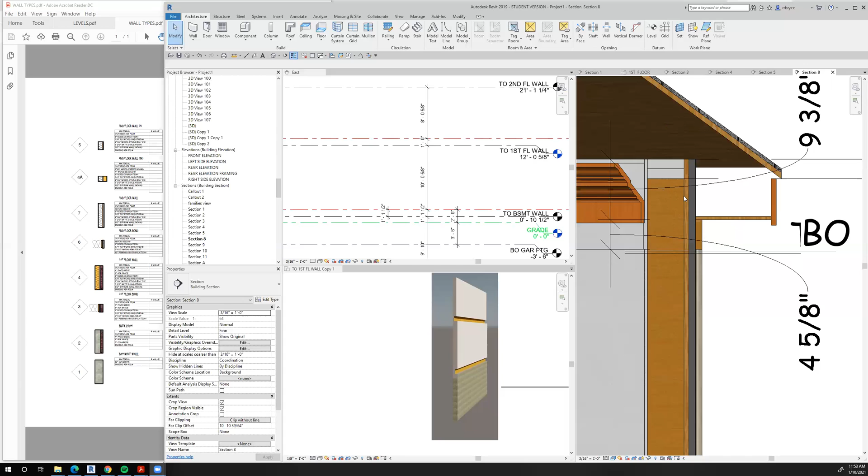You may have a different fascia size. You may have a different overhang, and all of those things will change where exactly the height of these two components would be. But we'll use that for now, and we're going to make a second stacked wall. So here's our first stacked wall. Let's get back here. That's our first stacked wall. That's our exterior house wall.

Now, what I like to do is, let's see, what's the best way to show you that real quick? Might not be able to show it. Yeah, let's take a look at section 1. No, that is section 1. All right. I like to keep a working example of all of my different stacked walls in my project. So I'm going to say that this is going to be my working example area. So I'm just going to copy this guy over to here, and I'm going to click on him.

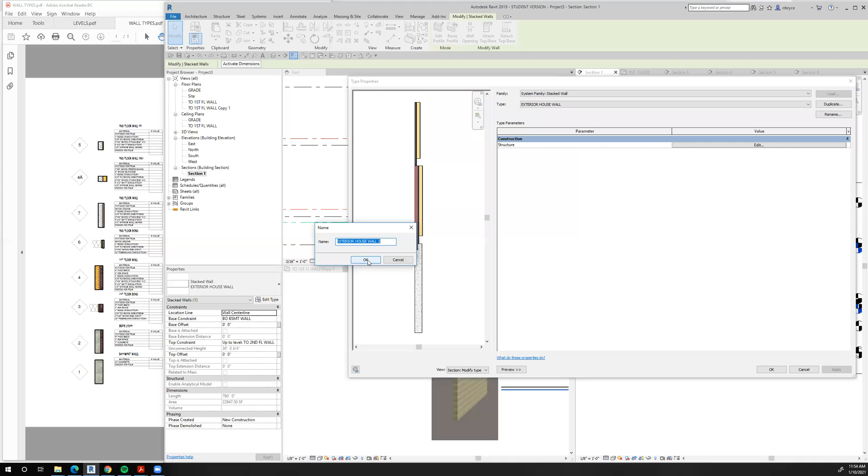We're going to do the same thing, edit the type. We're going to duplicate it, and we're going to call it exterior house wall 2. And we'll say okay. So I'm going to keep my exterior house wall as we've made it, but now we're going to change it, and we're going to add 2 more at the top. I guess it'd be these 2 right here. So this guy, we're going to make this height, what did we say, 9 3/8.

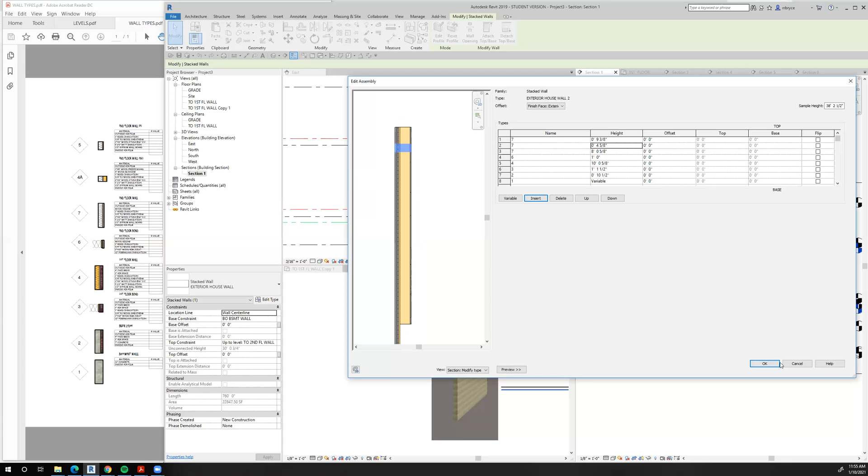That didn't work out too well. All right, let's change that to 9 3/8 inches. And then we're going to change this guy to 4 5/8 inches. Okay, so let's check that. We're going to make that 0, 4 5/8. Okay, so I've got these 2 different stacked walls in here. Now my issue is, remember that this total wall height, let's say okay to that for just a second, the total wall height has to be 8 foot 0 5/8.

Okay, so I've added 2 more pieces to that. So I have to add these 2 heights together and subtract it from my 8 foot 0 5/8, because that's the total height. So 5/8 and 3/8 is 8/8, which is 1 inch. So I have 9 and 4 is 13, plus 1 is 14. So I have to subtract 14 inches, or 1 foot 2, from 8 foot 0 5/8.

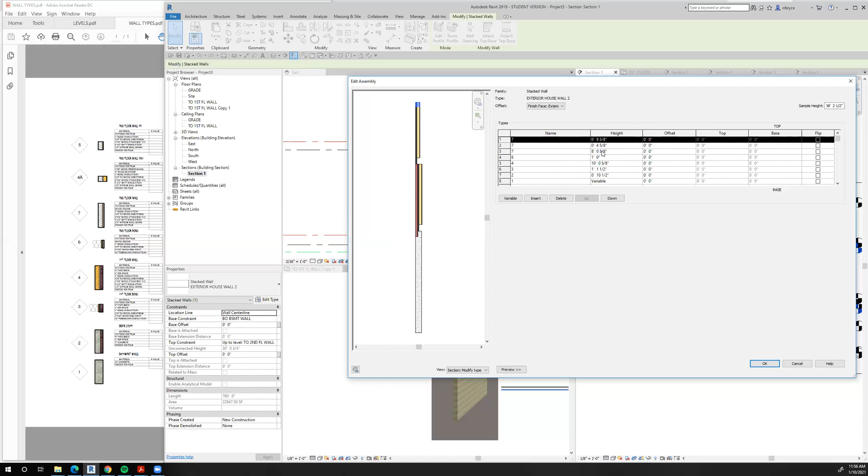So if I make this 10 inches, that'll be my 2. And I take this from 8 to 7. So these 3 should still add up to 8 foot 0 and 5/8. So let's see if in fact it does.

3/8 and 5/8 is an inch, and 5/8, we'll leave that. So 9 and 4 is 13, plus that 1 inch is 14. So that's 24. So that's 2 feet, 7, 8, 9 foot, 0 and 5/8. So it adds up. Okay, so we put those 2 in. We haven't changed the types yet.

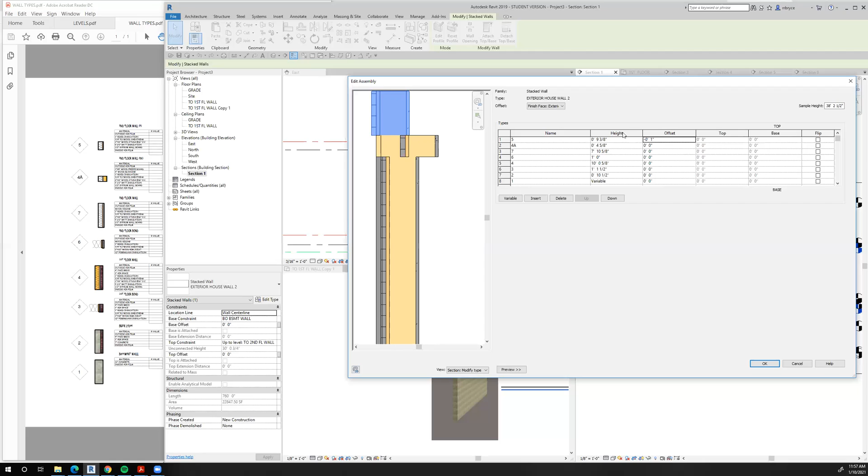So we're going to change this from wall type 7. We'll change it to wall type 5. And we're going to change this guy from 7. We're going to change that to 4A. All right. Now, I said we made a mistake on that one. And we're going to have to offset this guy by, let's try an inch and see what happens. It's a -1 inch. Let's see what happens there. That looks okay. That looks like it lines up.

But here, I have to take out the 4 inches that we put in there for that. So 4A, we're going to have to change. So we'll say okay to that. We'll say okay to that. And so now it's a little goofy, but we're getting closer to where we want to be. What I'm going to do now is I'm going to go back to floor plan. We're going to go wall. We're going to go back to 4A is what we're looking for.

This is not the floor plan that we want to be dealing with. We want to be dealing with level 1. Let's try that. Okay, now we're looking for architecture wall 4A. I'm going to edit 4A, duplicate it, and we'll call it 4A2. That's fine. And I want to take out this piece here.

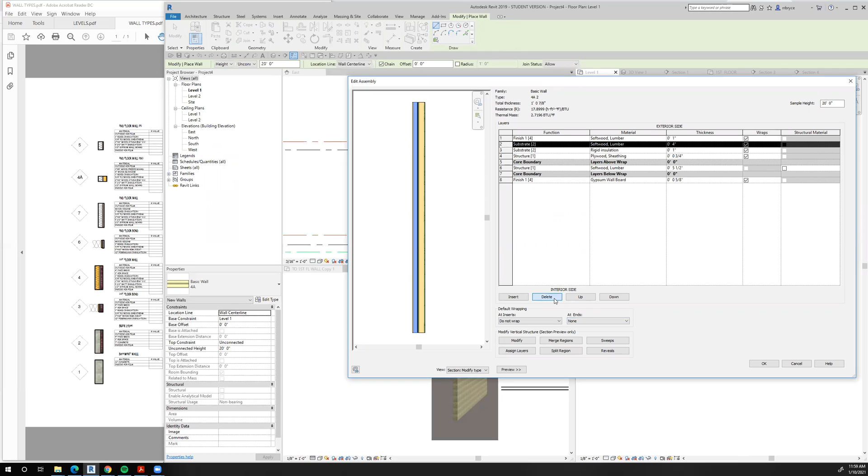Remember I said I want to take out that 4 inch because this particular wall assembly is if there were brick on the second floor, and there isn't. So I'm going to delete that. And I think we're in good shape now. Yeah, that looks good to me. I'm going to say okay. I'm going to say okay. Now we'll go back to that object right here. We're going to edit this type. And we're going to come over here, and instead of being 4A, we're going to put 4A2 and see what happens.

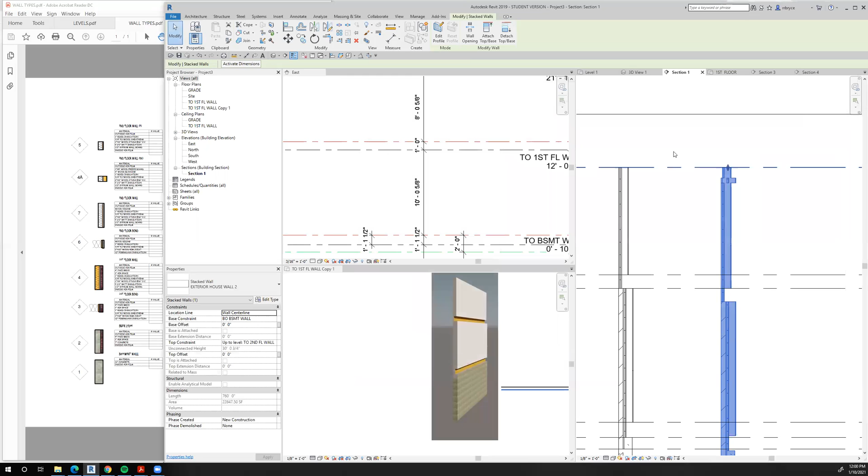Looks like I didn't save it. After I did all that work, I didn't save it. So we'll say okay to that. And okay to that. Go back to level 1. We'll go back to architecture wall. There's a 4A2 in here. So that's very interesting to me why we don't see that. Let's see, what's this guy? Exterior house wall, exterior house 2. Okay, so that's the one we want to edit, but I want to put in 4A2 here, and I didn't see that.

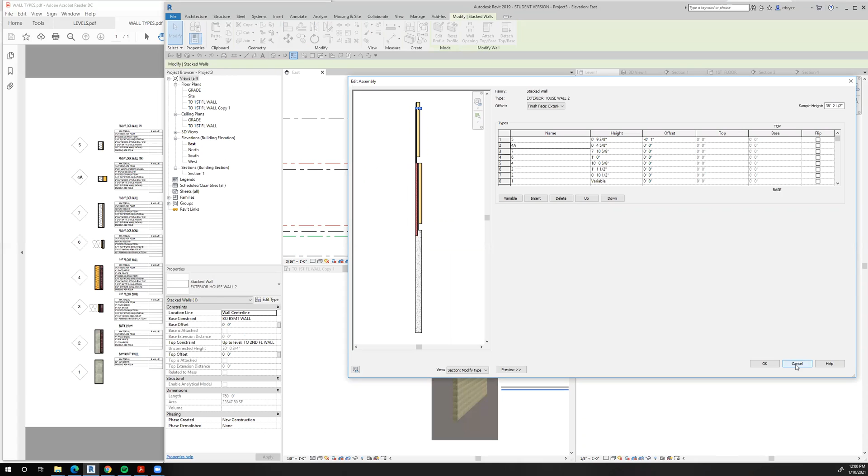That's interesting. I see it. The only thing possible here is that I'm working in 2 different... No, I don't think so. I'm trying to figure out what my issue is here. Well, let's see.

Okay, so what had happened here is I made 4A2 in a different model because I have several different models open, really just for demonstration purposes. But what I ended up demonstrating was the fact that I wasn't paying close enough attention to what I was doing, and I built 4A2, that wall type, in the wrong project. So when I tried to change this 4A to 4A2 in this project, 4A2 didn't exist.

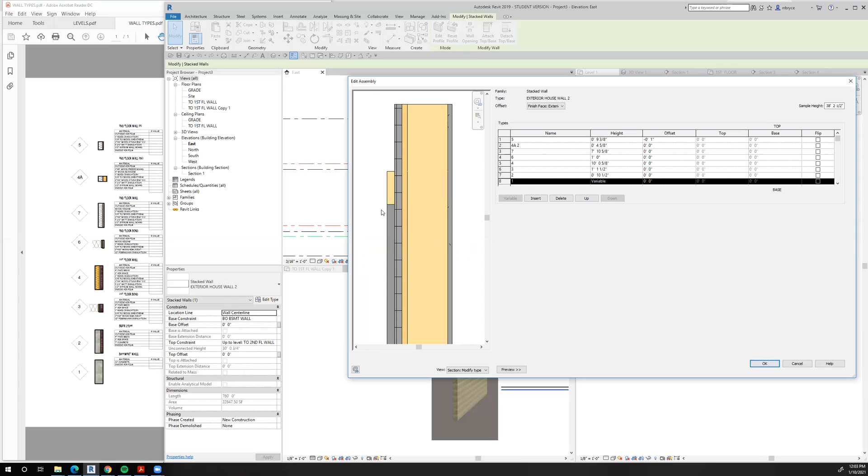So I simply copied it from the model that I actually made 4A2 in, and I pasted it into the model that I'm working on here. So we're going to edit this type. And we're going to edit here, and we're just going to change 4A to 4A2. And let's take a look and see how that looks now. Yeah, that looks better. You can see that that wall looks better. So now I'm going to say okay to that. I'm going to say okay to that. And now we have two different wall types here.

We have the one which just has the two different stacked walls. They're exactly the same except for what's going on at the top here. And this is just a simple second floor wall from the second floor all the way up to the top of a second floor wall. And this is a stacked wall that I haven't subtracted the distance I'm supposed to take out from here. I did it in, so let's take a look here and see what's going on.

7'10", that's the correct, 7'10" plus 4, 9 is 12, 13, okay. So this is good because now you can see that I've got a problem here, that the height of this wall is 9 foot 0 and 5/8 when I really want it to be 8 foot 0 and 5/8. So I need to take out, my math was done poorly. I need to take out another foot from this wall right here.

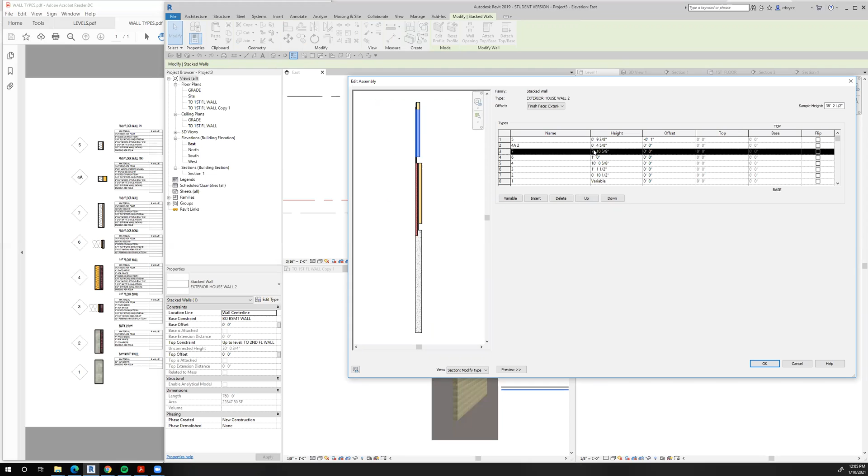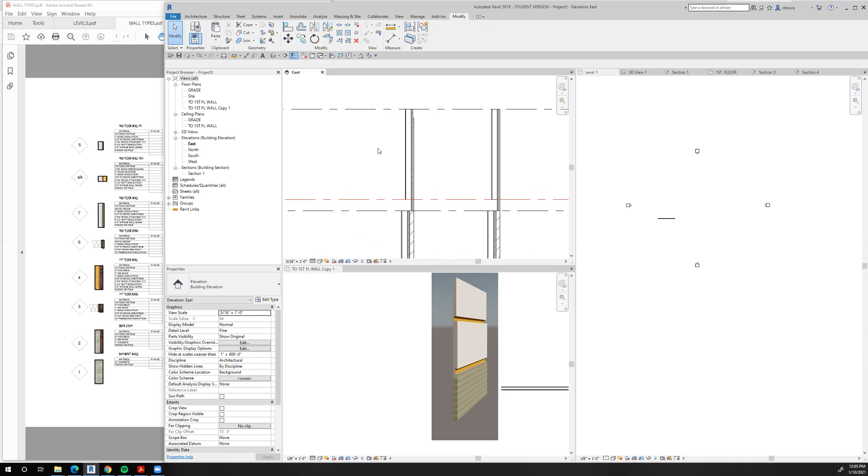Instead of this wall here being 7'10", I need to make it 6'10". And let's see if that fixes everything. Yep, now everything's fine. So the total height of that wall now is 8 foot 0 and 5/8, and look at how everything lines up and everything works. So rushing through it a little bit too quickly, I believe, caused me some errors, but the nice part about those errors was that I was able to hopefully illustrate the resolution of those problems. But the important thing is that the band areas line up with where we're going to put our floor joists. So we have to make sure that those heights are correct.

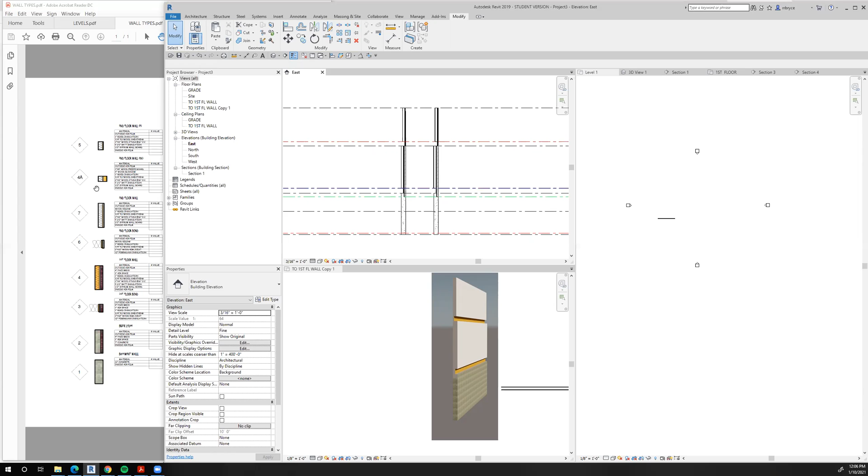Now, it's very important to me and to you too that you understand stacked walls. So we're going to build a couple more stacked walls in the next few tutorials. The reason that it's really important is because it's a powerful tool for Revit. But also, with respect to this class, your midterm will be to create a stacked wall. So when the midterm shows up, I will give you a PDF of a stacked wall with all the different wall types that go into that wall and all the different elevations or levels or dimensions of the different heights of all of these different walls. And your midterm will be to create that stacked wall. So it's important that you understand stacked walls.

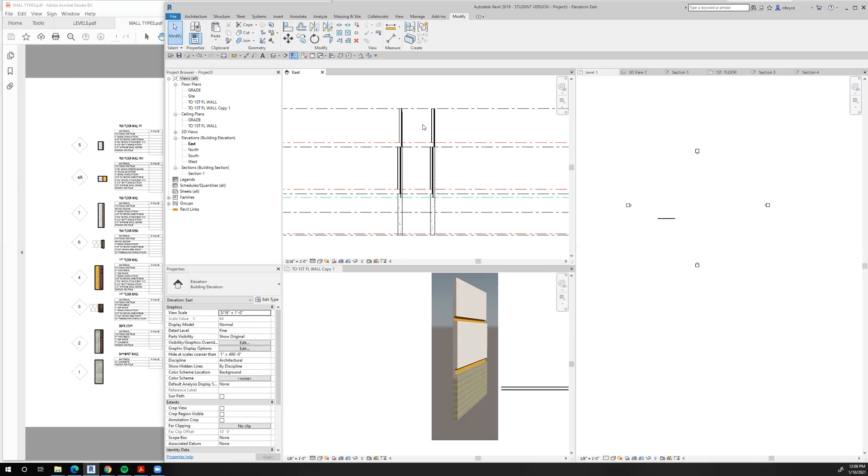But the point that I'm trying to make is that your midterm will be on the exercise of creating a stacked wall. And so you really do need to understand how to create stacked walls. And when you make a mistake, like I just illustrated there, I wish I could say that was intentional, but it was an accident. When a mistake or an error is made, then we have to figure out how to remedy that. And because I've had a lot of experience in mistakes with respect to Revit, I saw very quickly how to remedy that issue. You are learning stacked walls for the first time, so it might take you a lot longer to notice the error, number one, and then figure out how to fix it, number two. But anyway, that's our second stacked wall tutorial.